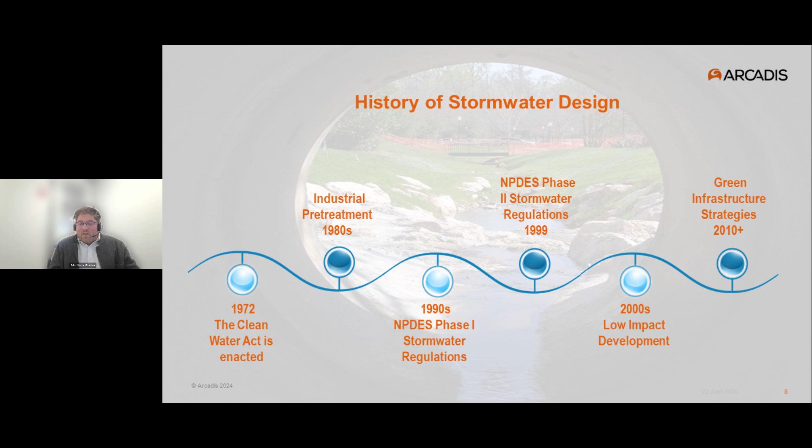So in modern times, we're shifting to green infrastructure strategies that aim to return sites to their natural hydrological condition and treat stormwater at the source.

Traditional stormwater management approaches offer poor control of the smaller, more common storm events, and in fact those things are being neglected altogether, with traditional designs allowing them to pass through a system unmanaged. These more regional approaches really focus on large, less frequent events, like the 2 through 100-year design storms.

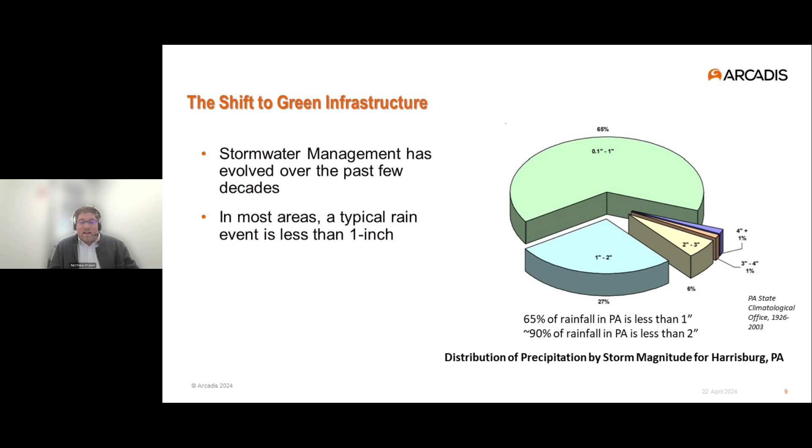So green infrastructure mimics the natural hydrologic condition of a site, and typical GI practices are designed to manage low intensity, high frequency stormwater events.

Green infrastructure practices are meant to mimic that natural hydrological cycle, and the practice on the right here is what I'd describe as a typical bump out. A lot of people have probably seen this. It collects gutter flow from a roadway surface, ponds water within the surface storage area, and then stormwater can draw down through the soil into an underground trench or storage media.

That filtration through the surface soil has a tremendous impact on improving water quality, as opposed to traditional gray infrastructure on the left, which collects dirty runoff from a street and quickly tries to convey it to a nearby body of water.

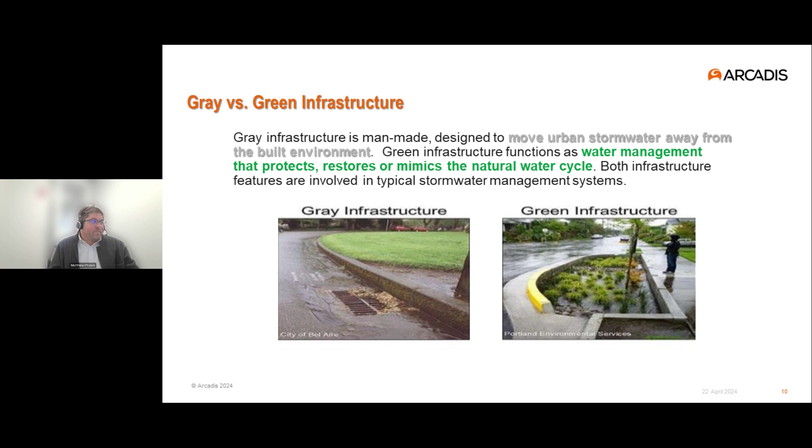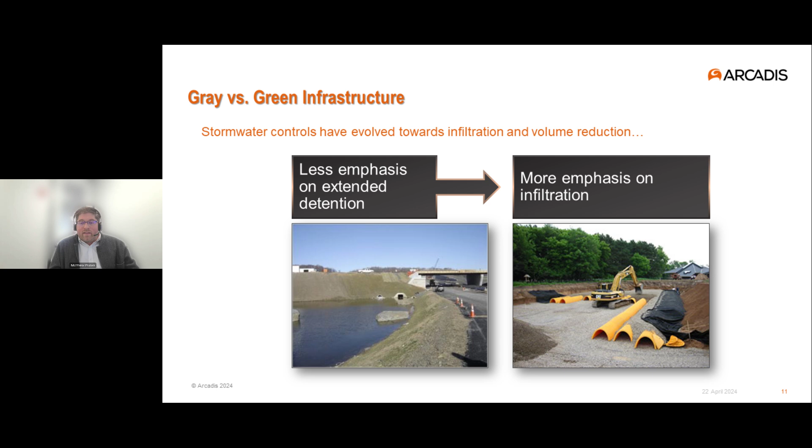So we're moving away from large surface detention basins that slowly release runoff, and moving towards infiltration practices where we can. What we see here on the right is a StormTech arch system, and those function like detention basins in that they provide rate control, but they're also providing volume control through an open bottom. Typically you'd see these placed underground below parking lots, and in some instances people utilize them for conveyance piping too.

So now we're arriving at green infrastructure and how it's different from that gray approach. Some of the major benefits of green infrastructure practices are treating stormwater at the source, and eliminating costly detention basins that utilize a lot of valuable land space.

We're not going to allow stormwater to get back into the aquifer unless we use recharge practices. We need to think of stormwater as a resource, not a waste product. We're also reducing energy demands by mitigating the urban heat island effect usually seen with large expanses of asphalt. And lastly, there's a societal benefit to green infrastructure, as liven up a space fosters a sense of community within the neighborhood.

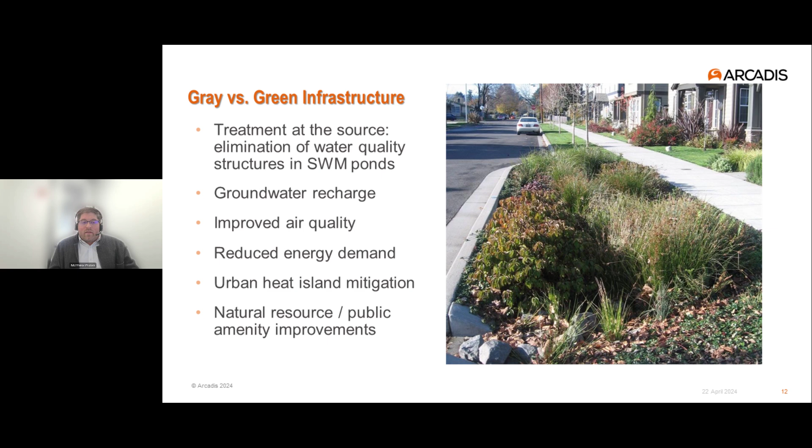So let's talk about GI design first, focusing on right-of-way green infrastructure. I should be upfront that a lot of these photos I'll be sharing today are from Arcadis projects, but not all are. Some are from my own neighborhood where I live, and others are just really interesting projects I've seen over the years that help tell this story.

And in this case, it's the right-of-way. With GI, we're going to work with smaller drainage areas and view stormwater as a resource, like I said before, and not a waste product.

We're going to manage the stormwater on site as opposed to conveying it far away. By managing the runoff on site, you're going to promote infiltration, evapotranspiration, evaporation, all those typical processes that are a more natural cycle. And you're going to be improving water quality because you're giving the stormwater a chance to be filtered through a surface soil or some other kind of media.

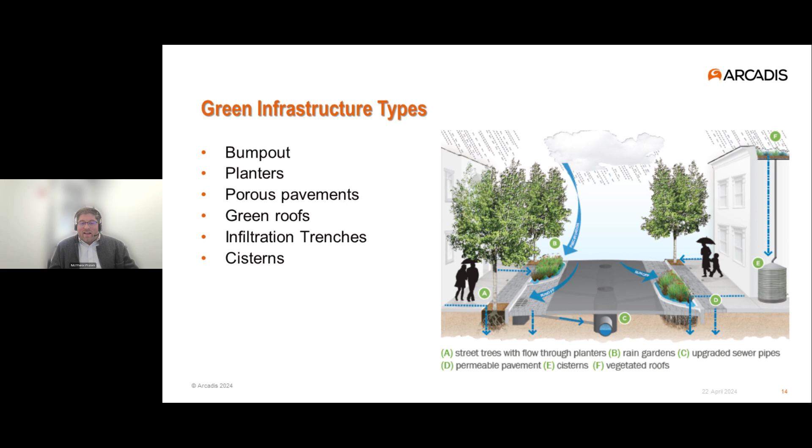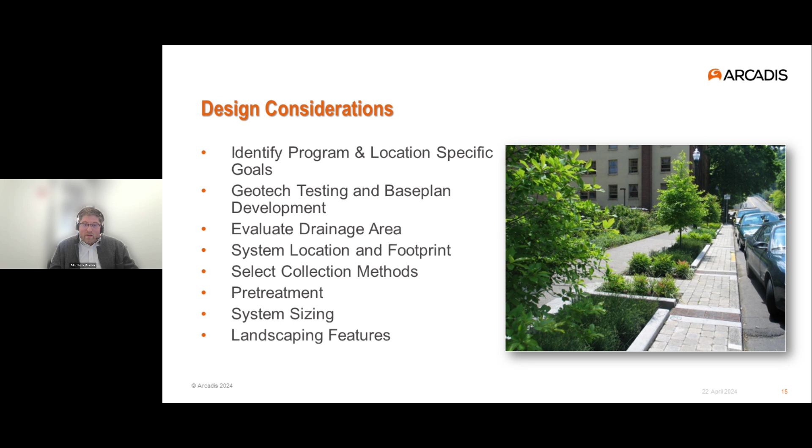So from a designer's perspective, there are significant considerations we need to keep in mind when tailoring green infrastructure to meet our site-specific issues. These can range from identifying program or site-specific goals, to how we evaluate the drainage area, to what kind of pre-treatment should be utilized. We'll step through a couple of these things over the next few slides.

As a design engineer, I'm interested in solving problems and achieving goals for a client, for a project. For green infrastructure projects, it's important for designers to be thinking about the municipality or organization they're working for, and its site-specific or program goals. On this side of the slide, I'm going to be using the Philadelphia Water Department as an example, but you'll see similar situations in other municipalities across the country as well.

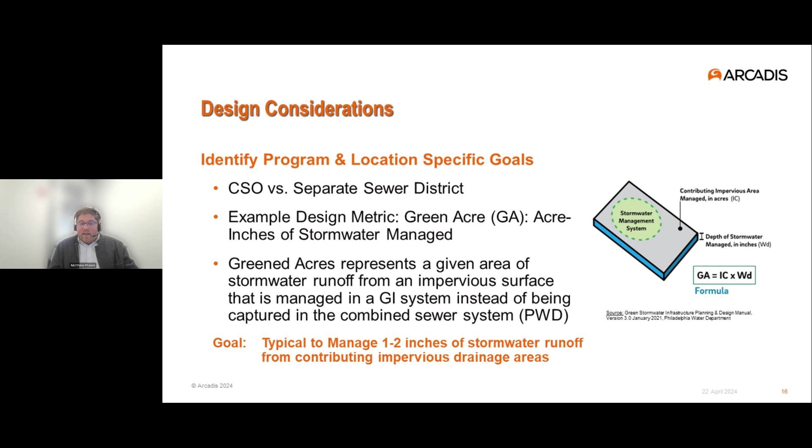One of the key metrics used a lot when evaluating green infrastructure is a green acre, which, for those who aren't familiar, is a given area of stormwater runoff that ends up being managed by a green infrastructure practice instead of being captured and handled by the combined sewer system.

Another design consideration gets informed by geotechnical investigations. Geotech investigations are important because they establish the subsurface soil characteristics and help us identify any hydrological limitations, such as bedrock or groundwater.

GI practices can still be utilized in areas that have poor infiltration rates. In that case, you'd be utilizing a slow release type of design to detain and slow down how quickly water leaves those systems.

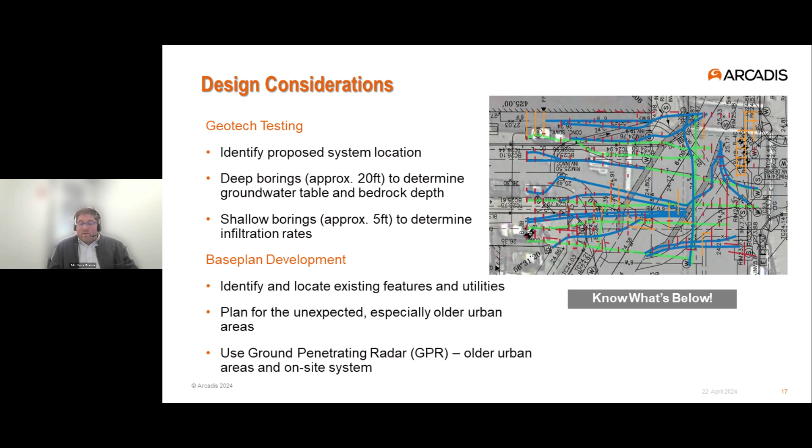In some instances, it's important for designers to utilize subsurface utility engineering or ground penetrating radar to help locate existing utilities. It's good to know that up front because it can avoid costly challenges in construction for unplanned conflicts, or even worse, if something was accidentally damaged during construction.

Another design consideration for GI practices that's really critical is location. Your practice should aim to capture the largest area feasible for a system. We can't design effective stormwater practices if we don't get sufficient inflow. In a right-of-way, urban setting, we're typically going to be looking at the end of a block. That's preferable to doing something mid-block or further up the drainage area, because you just want to maximize the area that you're managing.

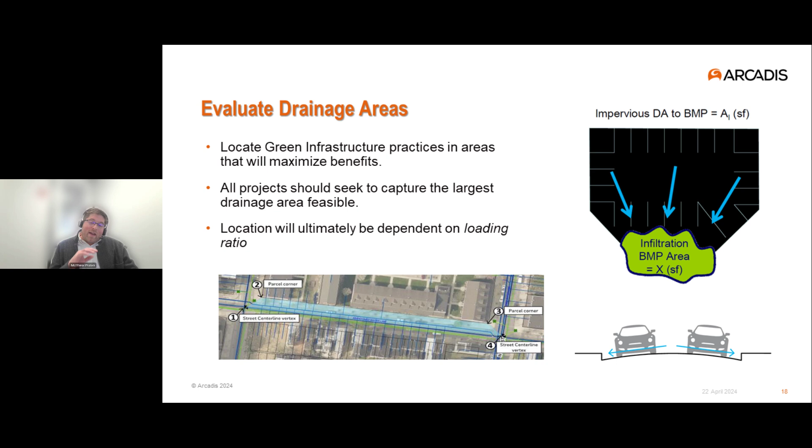A controlling factor to also be thinking about, particularly for infiltration designs, is loading ratio. If you're not familiar, loading ratio in green infrastructure is just another guideline you have to consider for sizing an infiltration footprint. Usually you're considering the ratio between the drainage area you're managing and the available green infrastructure practice footprint.

There's a couple different collection methods typically used for green infrastructure, usually done with a green inlet or a curb cut. Green inlets are no different than a regular inlet, it's just that they're conveying the runoff to the GI practice instead of the sewer itself.

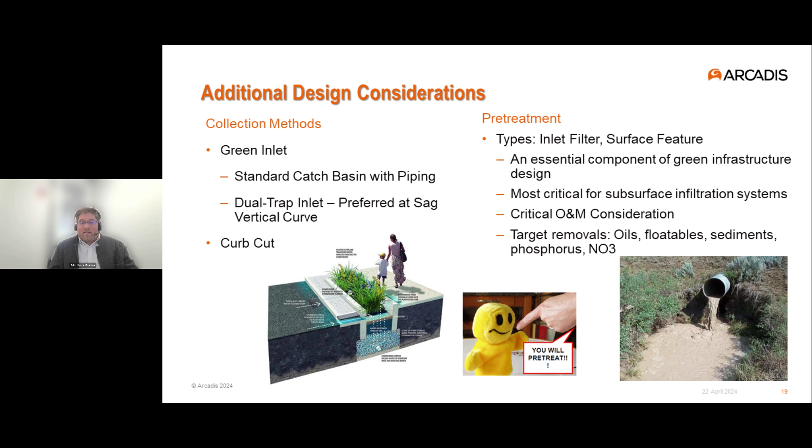One that you may sometimes see at the corner of an intersection is a dual trap, which can be used simultaneously to drain a low point and also route stormwater into a green infrastructure practice. O&M considerations are super critical for thinking about designs, because we need to ensure the longevity of an infiltration practice, and to do that best is using some sort of pre-treatment.

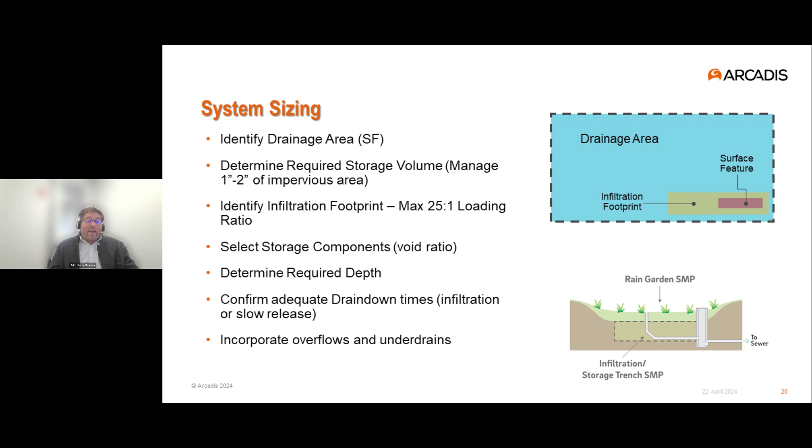When it comes to sizing your green infrastructure system, it's identifying that drainage area you're managing, making sure you're thinking through the local goals of your project, and managing that 1 to 2 inch depth of runoff. You should also be thinking about what kind of drain down time you'll need for your system, and considering what kind of overflows or underdrains might be necessary to ensure a safe design.

It's also really important to be thinking about the soil you're using for green infrastructure. This slide has a typical engineered soil recipe mix. The big thing to think about is making sure that when it gets to construction, contractors installing these systems aren't just using the backfill that was excavated, or stopping over at the local hardware store or Home Depot to pick up a bag of builder sand or polymeric sand for a system.

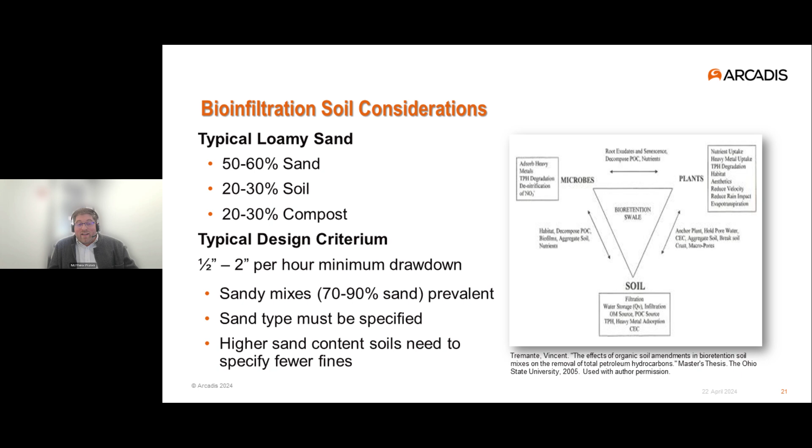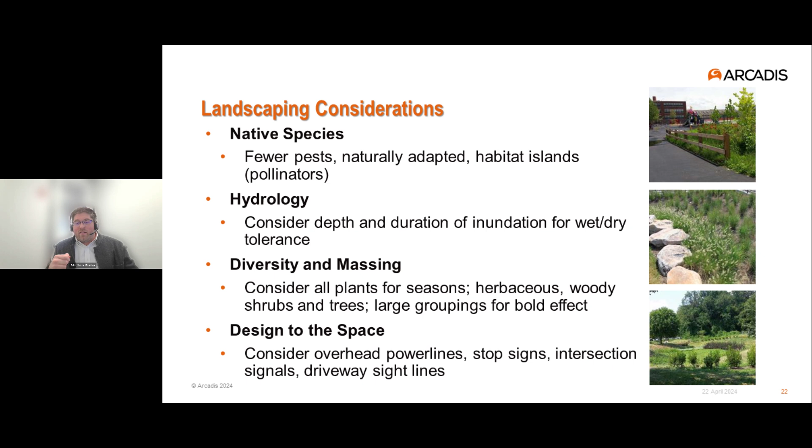There's landscaping considerations to be thinking about for green infrastructure too. Your selected plantings need to include native species, and public outreach is super critical for community buy-in at a lot of these practices. One of the common questions we hear all the time is, why are these weeds being planted in front of my house? It's not that they're weeds, but we need to educate people and let them hear from us to learn what's important, and really hammer home that this green space offers a chance for beautification and for getting the community involved.

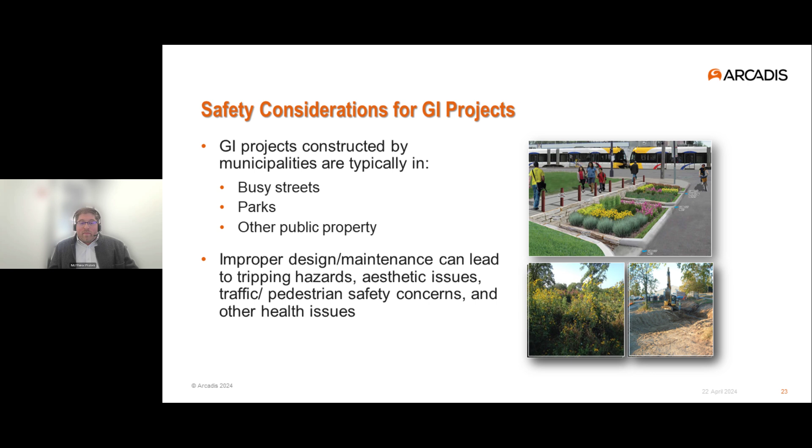Another big issue to be thinking about is safety. Many green infrastructure projects, green streets, right-of-way, bioswales, bump outs, those types of things, are usually located in the street. Rain gardens are often designed in parks where children and other users interact with them, and green infrastructure is often installed on public property, like town halls and community centers, frequented by residents and municipal employees alike. Improper design and maintenance of those features can lead to tripping hazards, aesthetic issues, traffic safety issues, and health issues, so we need to be thinking about some of those safety considerations for our projects.

There are many safety hazards that can arise in design that we need to be thinking about. It can be improperly designed drawdown times, which lead to stagnant water and insect breeding grounds. Curbs, curb cuts, anything with a large vertical drop or an uneven transition can lead to a tripping or fall hazard. Trash is the big issue, entering the green infrastructure facility or just being unsightly and limiting the performance of the practice.

Another thing we'll touch on is the lack of roadway striping or signage when you're changing traffic flow in these areas because of a BMP, and how that impacts driver safety. I'm also thinking about things like improper viewing angles for a vehicle at an intersection, or just pedestrians utilizing crosswalks.

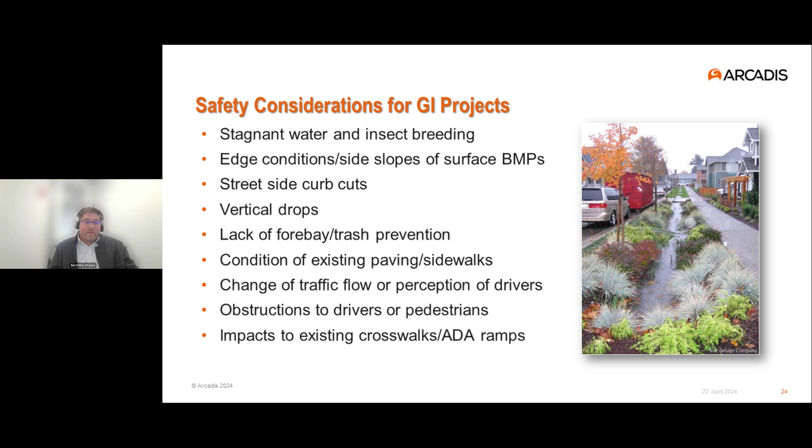So getting into some of these things, starting with essentially minimizing poorly draining water. Like we've mentioned a few times now, there's two safety hazards to think about: stagnant water and drowning issues. The potential for drowning is definitely a consideration when small children might be present, because it's important to think about - you only need a few inches of water where a person can become a victim of a drowning issue, unfortunately.

Also, mosquitoes breed in shallow, stagnant water. So it's important that our designs, as they detain and retain stormwater, make sure we're doing what we can for drain down to avoid breeding grounds for mosquitoes, which are both a health hazard and really just a nuisance issue. A lot of these systems target a drain down time of 72 hours or less, sometimes driven even more stringently by local codes and ordinances.

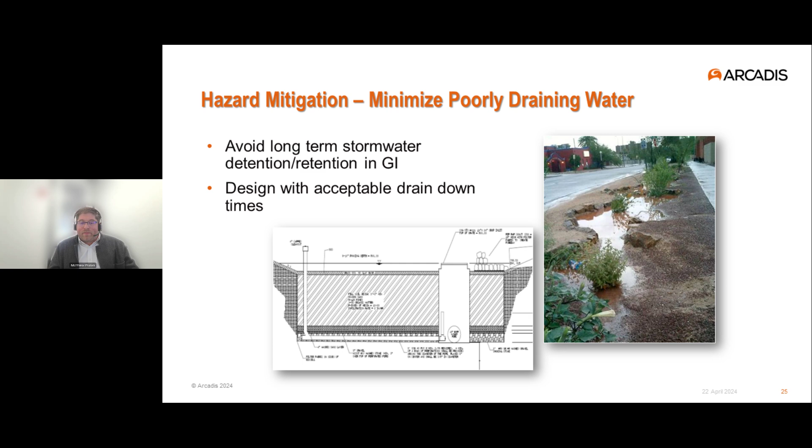In terms of providing proper edge conditions on surface green infrastructure, particularly for rain gardens, bioswales, bump outs, and those types of things, one of the key things is that your terrain is really going to dictate the design of the system, but we want to try to avoid steep slopes as much as possible. Side slopes need to be gradually sloping banks. A 3-to-1 grade is usually acceptable, and when you can do better than that, we should.

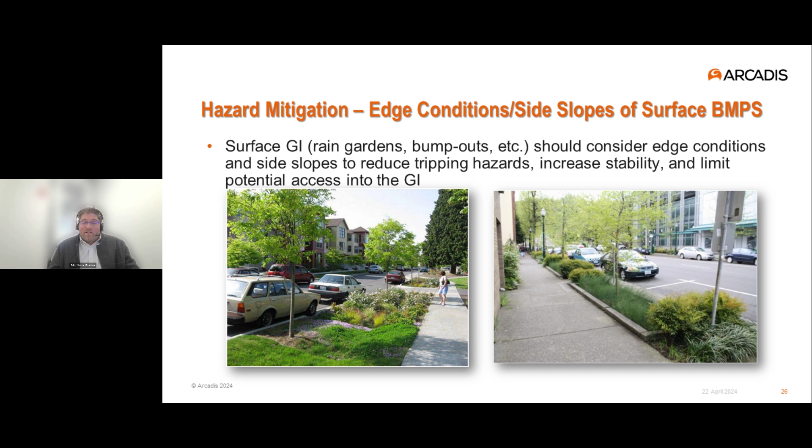When possible, if a facility has a steep side, we want to locate that away from a pedestrian route. As the photo on the right shows, shallow curbs between the sidewalk and a green infrastructure feature may look like they provide a visual barrier for somebody walking there, but we've actually heard stories from clients that they end up, more often than not, being a tripping hazard. That's usually due to people walking around paying attention to their cell phones, not thinking about where they're going, or just being distracted in general.

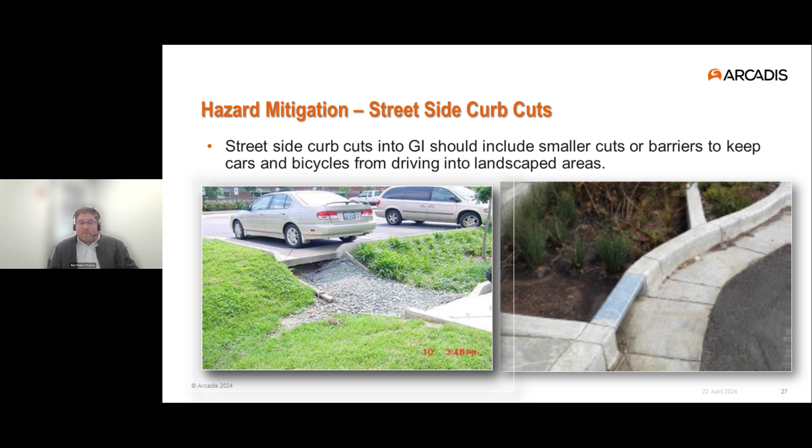Another common design issue is deep vertical drop-offs from the curb to the bottom of a green infrastructure system. We really want to be thinking about two sides when designing for these deep vertical drops: what's happening adjacent to the parking lane, and what's happening on the pedestrian side. For a lot of downtown or urban areas with parking lanes adjacent to green infrastructure, this could be a major issue for safety in both dry and wet weather.

On the pedestrian side of green infrastructure, many cities use things like fences or decorative railings to prevent pedestrians from accessing the green infrastructure. The access deterrent is a visual thing, but it also helps eliminate the issue of the vertical drop in general.

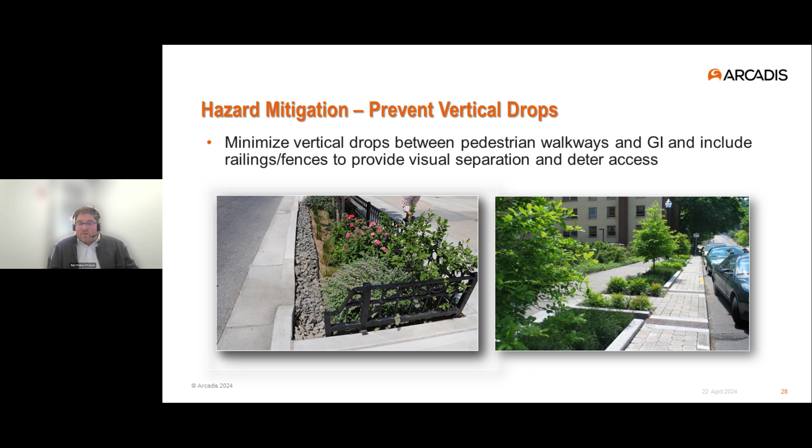I think a lot of local areas will tell you that you need to have some sort of fall protection, like a railing or a fence, if you've got a vertical drop of 30 inches or more.

Like we discussed earlier, trash is a huge issue. Things like cigarettes, candy wrappers, bottles, and cans, whether they get washed into a system through a storm event or get thrown in by a pedestrian, it's a major issue.

Green infrastructure needs to be designed with a forebay area. You can put a screen, a filter, or similar pre-treatment device to help collect that trash. It also can act as an energy dissipator, and it's a spot to make maintenance easier. It simplifies removing all that collected debris and prevents trash from collecting inside and limiting the green infrastructure's performance. Trash can also clog engineered soil or the underdrain, and then you have that issue with stagnant water again, like we talked about, where we'd be concerned about drowning issues or insect breeding.

One thing that some municipalities have adopted is putting collection bins next to the green infrastructure if possible, because it helps discourage people from throwing things in the green infrastructure if they can see there's a trash can to put their rubbish.

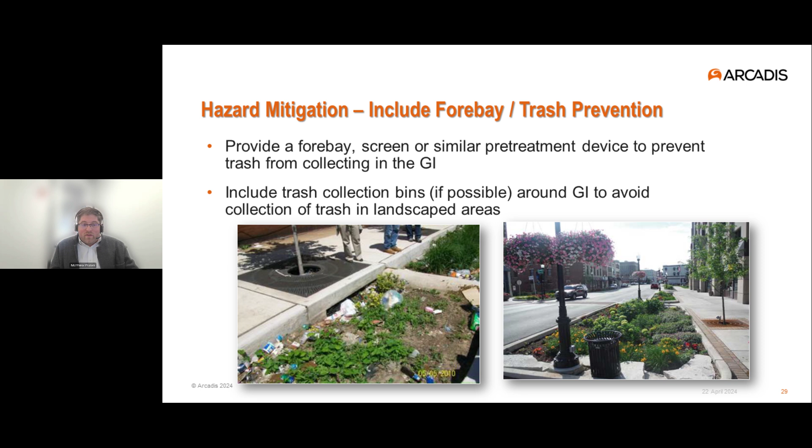One other issue that wasn't really addressed as much as it probably should have been in a lot of earlier green infrastructure installations was proper identification about changes to traffic flow areas where green infrastructure was added adjacent to a roadway. A lot of these green infrastructure practices can be utilized for traffic calming measures, which helps reduce speed and traffic volume.

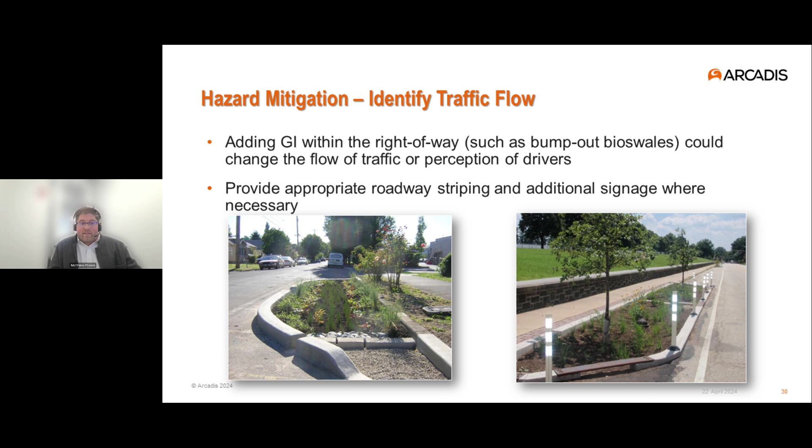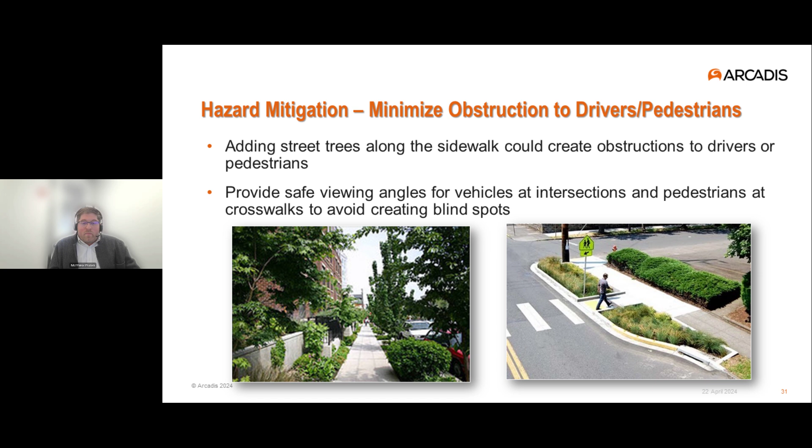We need to be thinking about providing safe viewing angles for vehicles at intersections and for pedestrians at crosswalks. You can see that photo on the right is a bit more of a cleaner example of how you can avoid creating blind spots.

Finally, a lot of urban green infrastructure programs, especially in major cities, are locating their SMPs in urban rights-of-way. It's important to think about the changes to the sidewalk, to the crosswalks adjacent to these GI features, and ADA ramps. Anytime you have a ramp that's affected by new installations, we should also be thinking about upgrading the existing ramps to be more ADA compliant.

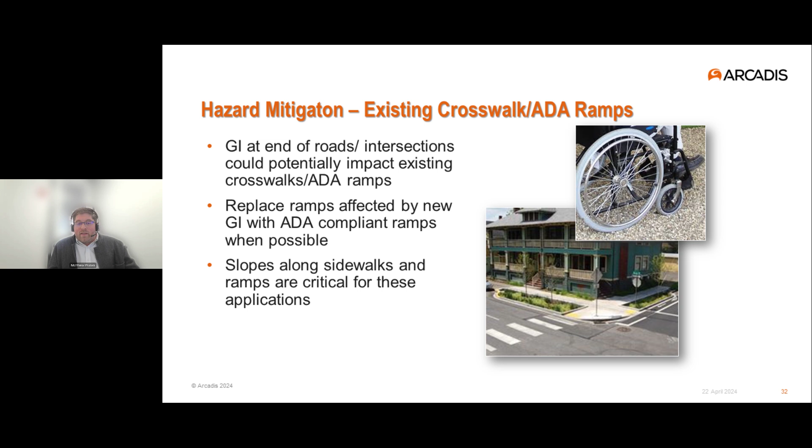And sometimes you need to be thinking about those that are close to, but not necessarily right next to, green infrastructure too.

Let's move on from the right-of-way and start talking about options outside of the traditional right-of-way. All of these concepts we'll be talking about now are centered around thinking beyond the streets. So a couple examples to consider here are large medians or vacant lots, parks, playgrounds, and other public works areas are opportunities too. And in some instances, we've actually seen utilizing front yards in residential neighborhoods as an option.

So what are the benefits of looking beyond the right-of-way? You get a much larger surface area, so there's a possibility to take in more drainage area without blowing out that hydraulic loading ratio we were talking about earlier.

Generally, you have a lot less utilities than what you'd find in the streets. We don't lose existing features that sometimes detract people from green infrastructure in the right of way, like parking. You're not going to change traffic patterns. You don't have to worry about those ramps we just talked about. Instead, it's a chance to maybe enhance an underutilized or bleak space.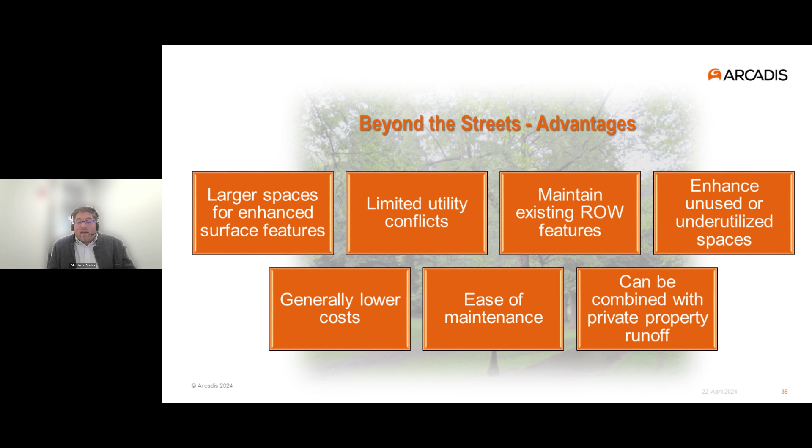And I've got some examples that I can show over a couple of slides here. Lastly, because you're in an area that's likely less congested by traffic or utilities, the construction costs can be estimated to be a little bit lower because we're not going to be rebuilding roads or sidewalks or dealing with so many of those conflicts. And here you get an even bigger benefit, like a double whammy, of managing both public and private property.

I think we should also take a minute to think through some of the challenges working outside the right-of-way too. Land ownership's a big one because it's not always something that's typically available, especially for municipalities. Also, there may be use restrictions on land too. Conveyance is a big issue, and we'll show some examples of that in a couple of slides here too.

Another thing to think about is while we want community engagement and action, not all neighbors really appreciate that. When you add these green spaces, it's going to attract more people to these locations, and some folks just don't want the extra visitors in their neighborhood.

Lastly, elevation is a huge issue because typically roads get cut in and then you surround those roads with lots that drain to the road. So that can be a challenge to think about overcoming.

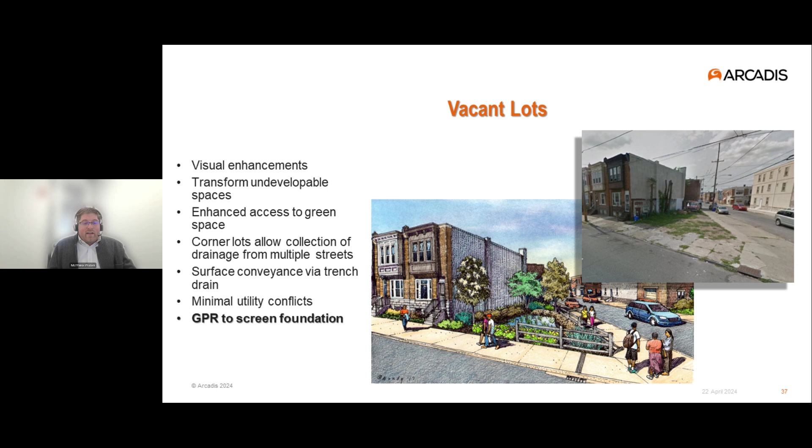I think it's a good space here to start talking about the vacant lots in general. This slide does a good job of showing how you can transform an underutilized space into something that's got a lot more visual aesthetic. Corner lots you can't always develop effectively, but one of the benefits of siting green infrastructure at a corner lot is you have an opportunity to manage stormwater from two streets instead of just one. A big thing here that I'm going to highlight on the next slide is going to be GPR again.

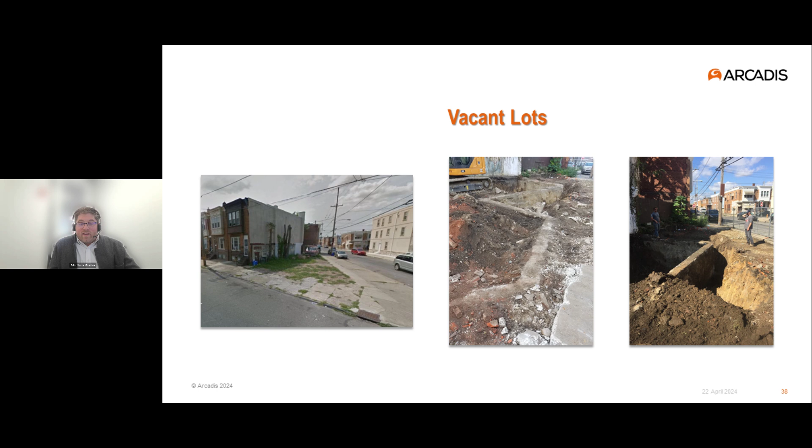So after this, the lesson learned, the takeaway here was we more regularly utilize things like ground penetrating radar as just part of the regular process at vacant lots, to see if an issue like this will pop up.

We'll go back to something that I think is a little bit more exciting, and I like this one a lot. It's a great example of a vacant lot green infrastructure system, and it's located right by my house, actually. It's a subsurface storage area with a rain garden component, and it's really interesting because it's a neighborhood favorite, especially in the spring and summertime.

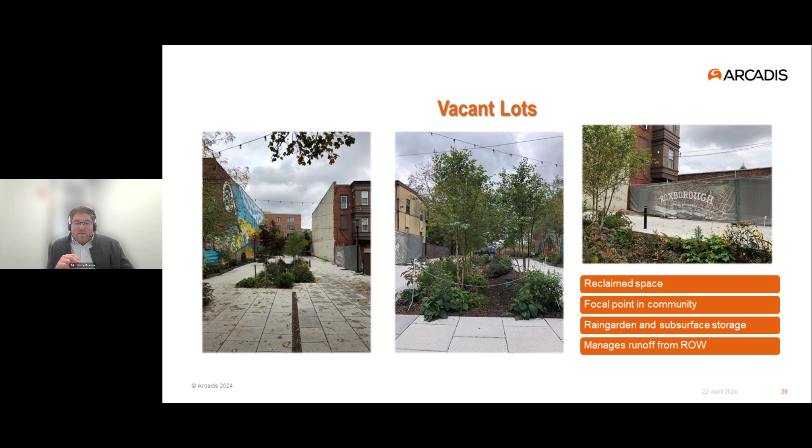I take my own kids here. It's a site that sits on a commercial corridor. There's restaurants, pizza shops nearby. There's always tables and chairs that are placed here for the community to sit and enjoy the space, and it's attracted things like food truck festivals and community events. But the real important thing is that it's managing runoff from the lot, but also from the public right-of-way as well.

Large medians, things like triangle parks - these we have all over Philadelphia where I live, but you can see them in other places like New York and Washington, D.C. too. It's really just a result of a boulevard that bisects a gridded network of streets. These are great spaces for considering green infrastructure.

Often it's underutilized, but community members do use it for focal points, for gathering points for activities. Like the vacant lot, oftentimes you can get multiple drainage areas from different streets, and usually there's not as many utilities to deal with.

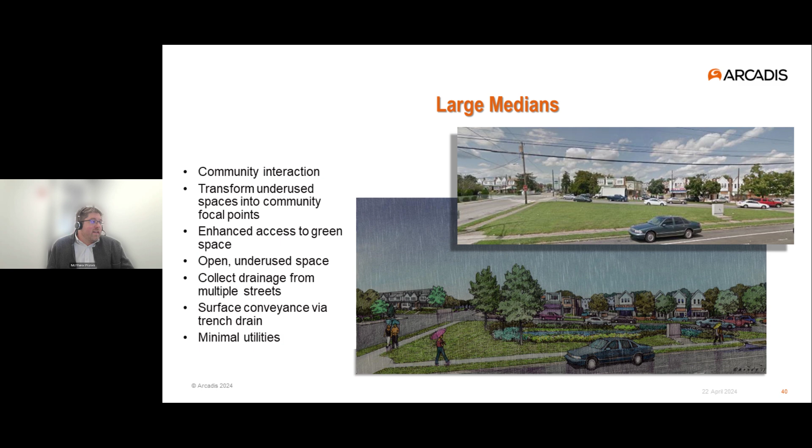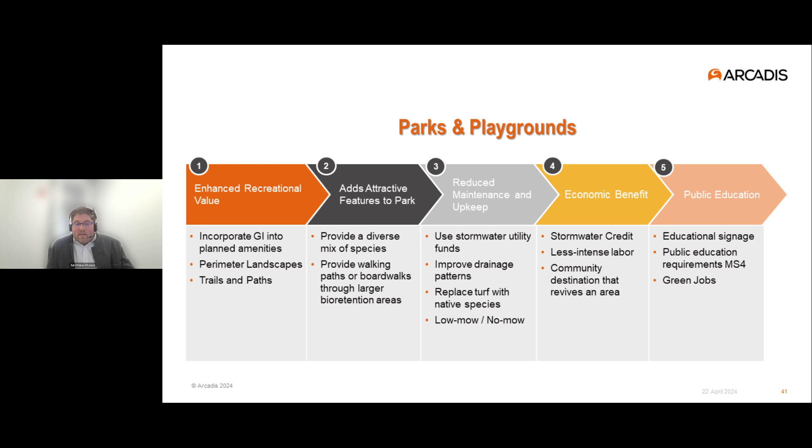Some other areas to think about for green infrastructure, beyond the streets and outside of the right-of-way, but these areas are typically abundant in cities, are existing parks and playgrounds. I like this graphic because it kind of details a whole lot of benefits when developing green infrastructure and other programming in these spaces.

Playgrounds, in particular, provide a really good opportunity to connect the community with the work that we do and with the parks themselves, while providing this awesome space for a green infrastructure project. One thing we do on a lot of our projects is add educational placards, because it helps the public know what's below and why you should or should not be walking through certain areas of the park.

Where they have rain gardens. In other communities, maintenance and litter patrol ends up being taken over by local residents who really value this installation that ends up near them.

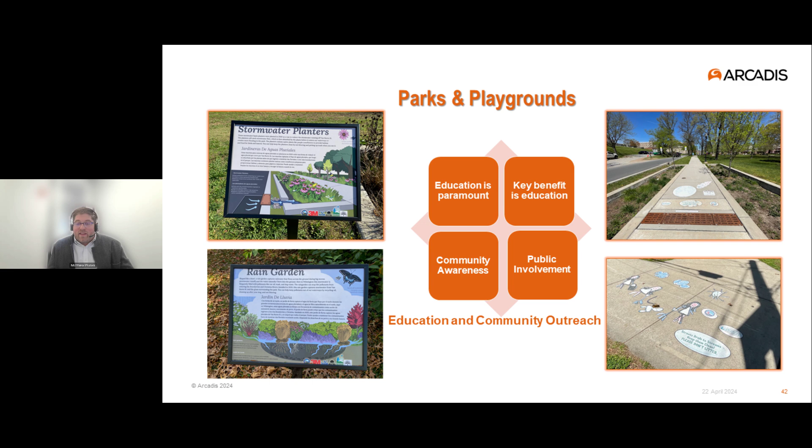And it just so happened we weren't really aware of this happening. I ended up walking the site with the city's public works team, and we found these things, and we were all really struck with how wonderful it was to see local stakeholders taking ownership of that green infrastructure and providing that community awareness piece.

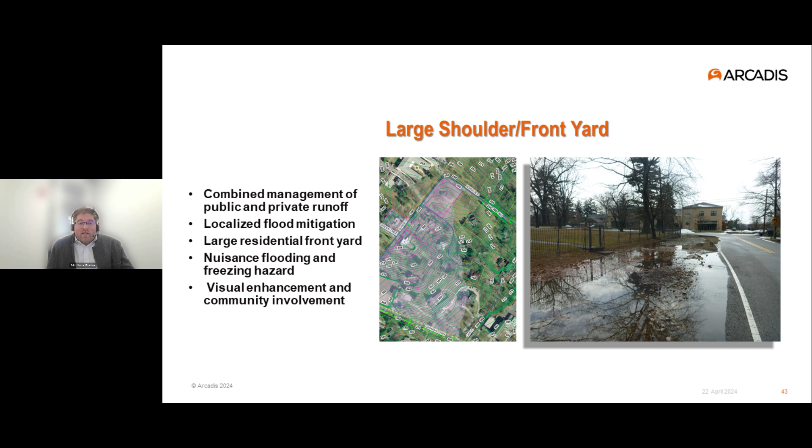Another really unique spot to think about that's outside of the right-of-way can be a large shoulder area or a front yard. And the photo here really shows an example of a situation we encountered a few years ago, where the shoulder and part of this person's front yard ended up with nuisance flooding that would pop up and result in freezing issues in the wintertime as well.

So you can see how this space, this front yard area, got transformed into a green infrastructure opportunity. It eliminated that nuisance flooding, it beautified the area, and it worked really well because in this situation there happened to be minimal utility conflicts right next to the shoulder in the front yard, and we had a very committed resident interested in seeing something like this.

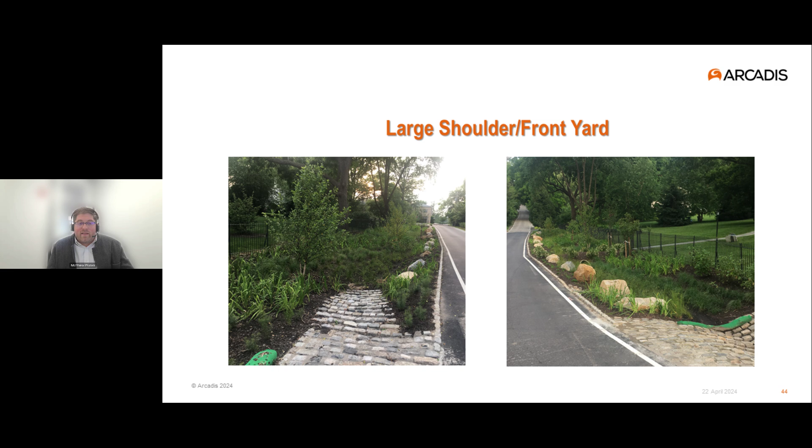So we've been looking at some design considerations and challenges and examples of green infrastructure within the right-of-way and beyond. I think next we can start looking at a couple of examples of recent projects where green infrastructure was really used as a vehicle to get more done. And I'll show you a few examples of what I mean by that.

The first project that's really interesting I can share with you is one at Cool Spring Park in Wilmington, Delaware, and I talked a little bit about it before. For some background, the park is located adjacent to the historic Cool Spring Reservoir, and it's really an urban oasis that's used by the local community and by a couple of schools.

Fast forward to 2018, and Cool Spring Park now regularly experienced flooding issues when even a minor storm event came through, and it would render the park and a lot of the playground spaces just unusable. This affected two local schools, the Parks and Recs department, and community groups that used the spaces, who had farmers markets happening there weekly, carnivals, food truck festivals, things like that.

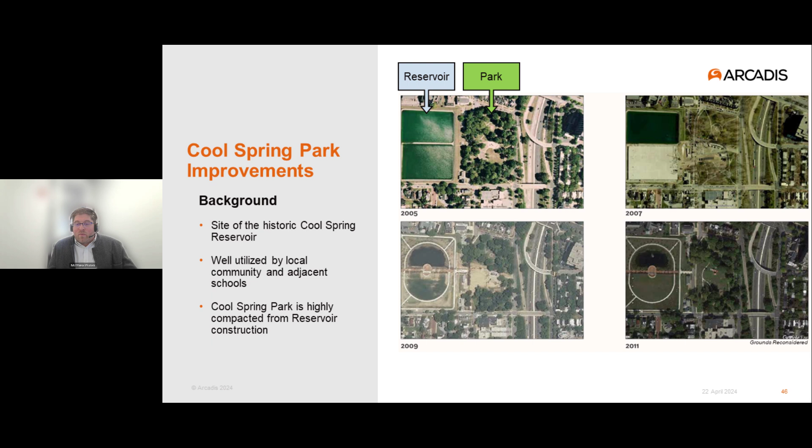So it was a situation where the Department of Parks and Recreation and the Public Works Department decided to partner with a goal to address this flooding issue.

So Public Works and the Parks folks both recognized there was a chance here for them to work together. From the Public Works team, it's important to know they made commitments as part of the city's long-term control plan to implement green infrastructure as a means of source control. The Parks and Recs folks had been evaluating this park location for improvements as part of a master planning effort, engaging with community groups and getting input. Those groups really wanted to see green space, outdoor classrooms, and improvements so that flooding wouldn't keep happening.

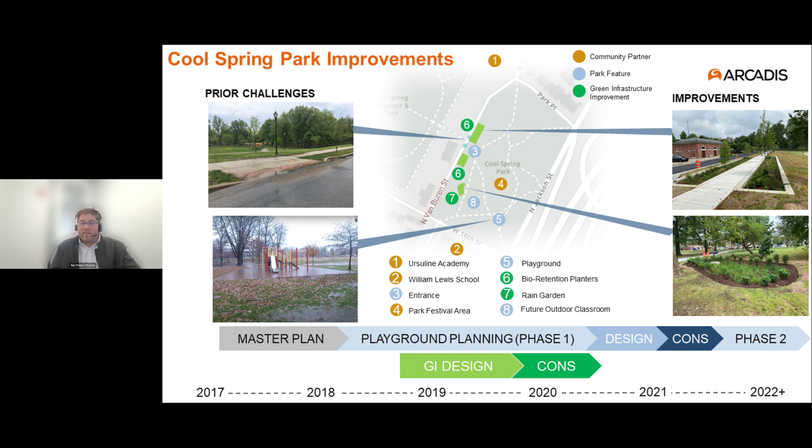Like you can see on the right here, the improvements designed and implemented were bioretention planters that managed right-of-way runoff, and they nicely framed the entrance of the park. There was also a rain garden that replaced the overly compacted soils in one corner. The rain garden area is really interesting because it's planned to become the beginning of a larger green infrastructure feature added in future phases of park improvements, and they're looking at using it as an outdoor classroom space.

So what are the overall project outcomes to take away as lessons learned here? The green infrastructure was sited to intercept stormwater in the right-of-way before it could enter the park, making a safer condition. It also addressed one of the long-term control plan goals for the city. Given the timing of engagement between all these stakeholders, the visible aspect of green infrastructure was implemented, making a space for the public to interact with a green space.

That led to an unexpected but really cool, satisfying situation where just a year later, the community and the Parks and Rec team chose to change their master plan after interacting with the space, to relocate the playground I've been talking about up to where these green infrastructure practices were. Since Parks and Rec provided space in their park master plan for Public Works to site this green infrastructure, and that addressed the long-term control plan goal, it allowed the parks folks to reallocate some budget dollars within their master planning effort to do something a little bit more.

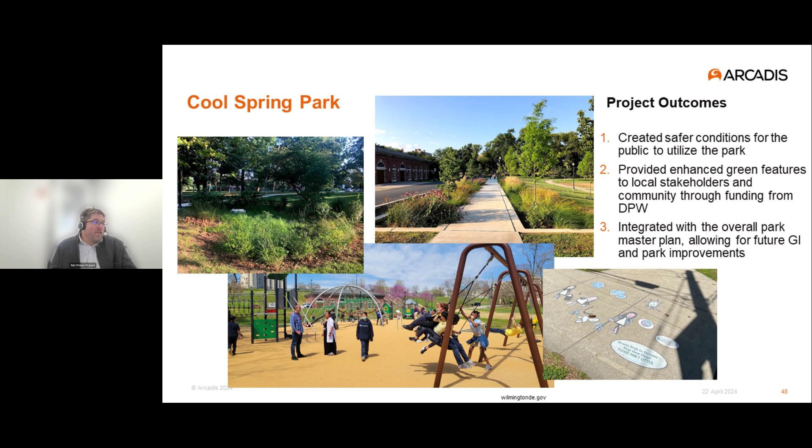The last example I want to talk through today is utilizing green infrastructure as a vehicle to get more done, found at another project in Wilmington, Delaware, called the Urban Artist Exchange. This project ended up being a collaboration between the Department of Public Works, CityFest, and the Urban Bike Project, two organizations utilizing the city-owned parcel.

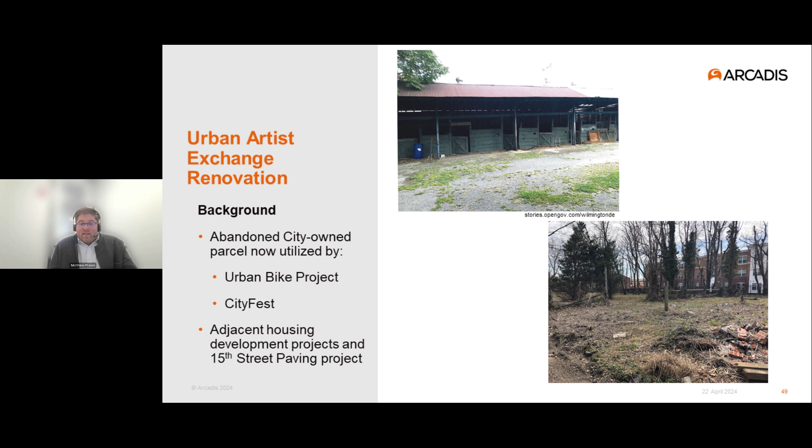It was previously an abandoned parcel that once housed the Wilmington police stables, shown in that top photo. This has been renovated since that photo was taken, and it's transformed the space into a cultural arts center for the community and a performance venue.

The story here begins further back than just the site itself. There were two housing developments called Walnut Ridge and Walnut Place. When they were being constructed, those developers needed approvals and permits, and while reviewing the development, the city's Department of Public Works identified an opportunity to see if the developer would install separate stormwater piping at these housing developments.

With a future goal of managing that runoff from the sites onto the city-owned parcel, as the green infrastructure planning and design for the site kept continuing, more projects were coming online with other stakeholders requiring even more coordination. One was a roadway widening and repaving project with the city streets department, including the segment of 15th Street bordering our site, right above one of these developments.

Lastly, the two groups, CityFest and Urban Bike Project, were already looking at rehabbing the site themselves. So the Department of Public Works acted as a connector between all these different improvements, and the planning across these four projects really coalesced into a really cool opportunity for each of the stakeholders.

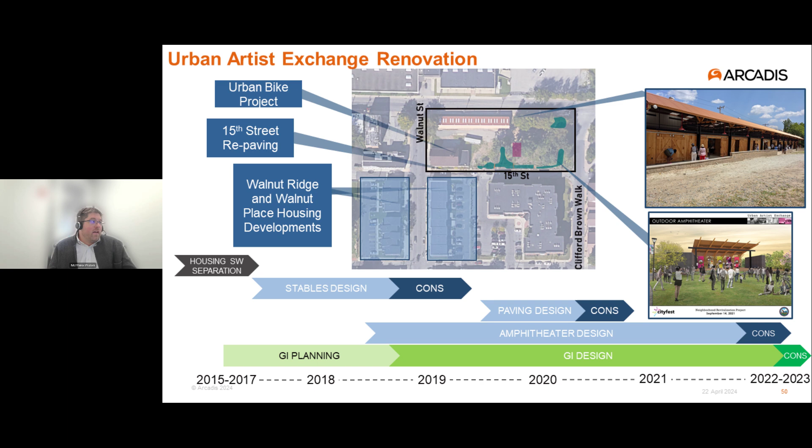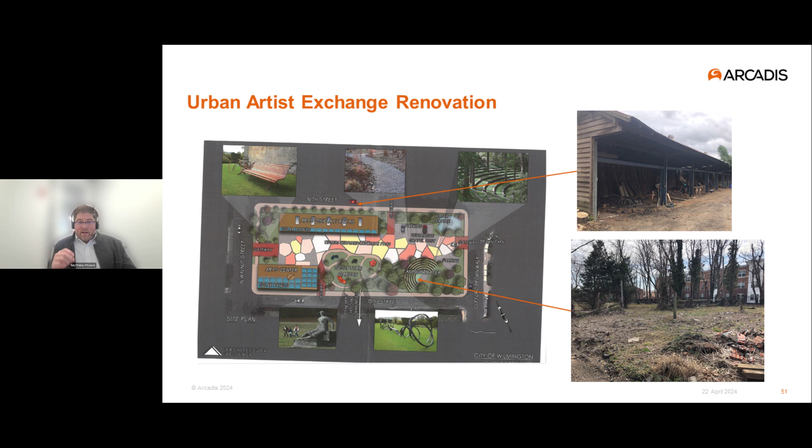They were looking at repurposing those stables for art spaces on the north side of the park. They had an outdoor sunken amphitheater on the southeast side, and there were tracks, paths, and driveway improvements that could be used for different programming activities. Take note, though, that there doesn't really seem to be a whole lot of stormwater planning in this concept.

Because of that early engagement with the Department of Public Works and the different stakeholders involved, all the different design teams were able to meet up, discuss their project goals, and collaborate to get more done than each of them had originally planned.

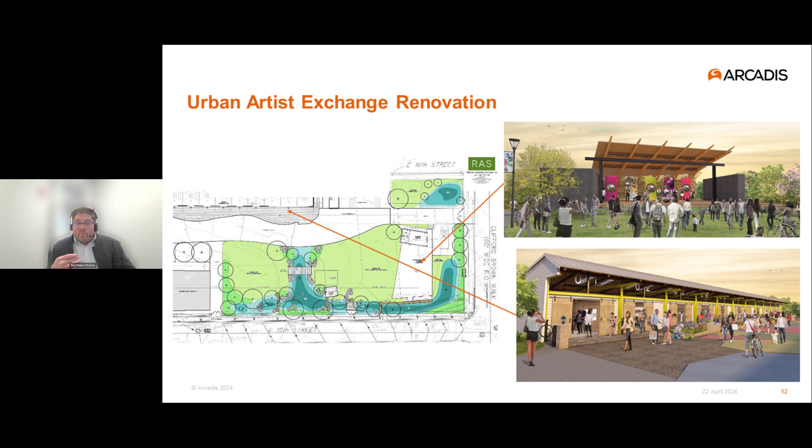You can see, though it's harder to see because of the scale, the roadway repaving project that was completed. They ended up trying to maximize the area they were managing by super elevating the road and pushing all the runoff towards the site so it could be captured.

In terms of a stormwater approach, we partnered with a landscape architect for their design team, focusing on prioritizing a green infrastructure forward solution at this park that complemented the park features. So what we ended up doing was a series of cascading rain gardens that bounded that 15th Street side of the site, adjacent to the performance amphitheater.

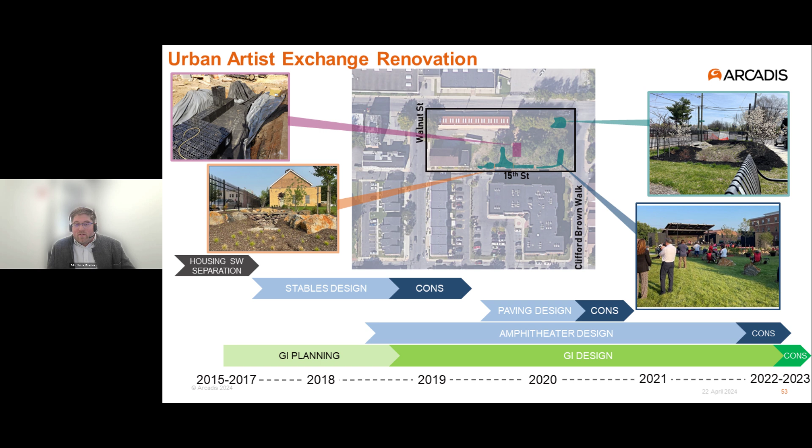We also worked to have a pedestrian bridge that crossed over the rain gardens and swales that the public would use as they access the site, creating a really big aesthetic as you walked onto the project. There was also a boardwalk over a rain garden connecting two different viewing or programming areas at the site. Additionally, we utilized some subsurface storage in the area immediately in front of the amphitheater, and there was another rain garden managing runoff from the street to the north.

The takeaway here is that early engagement led to a greater comprehensive site programming opportunity, I guess is the best way to describe it. Department of Public Works was able to take on costs related to some of the site improvements that were tied directly to putting the stormwater or green infrastructure practices on the site.

The Department of Public Works was able to unlock funding opportunities that wouldn't be available for traditional redevelopment projects. They could and did apply for state revolving fund loans and other grant monies that were awarded to the project and helped finance it. This allowed other project stakeholders to reallocate some of the funding they had and think bigger. The biggest example of that on the site is the state-of-the-art performance amphitheater that you can see in these photos.

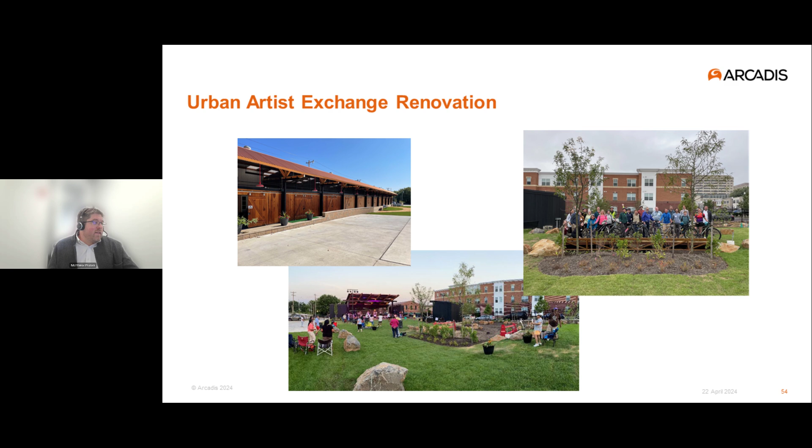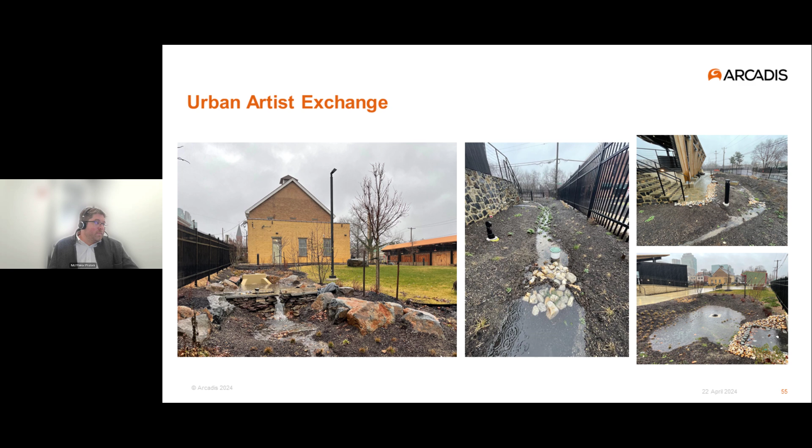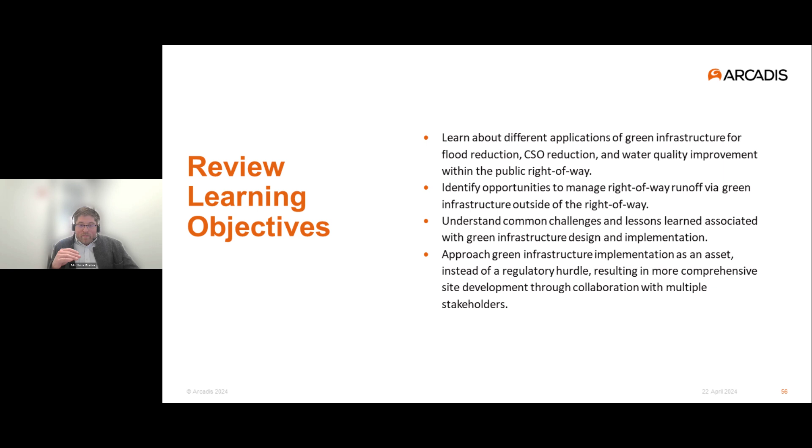As I wind down, I wanted to spend a minute recapping some of those learning objectives. Hopefully folks listening, whether you're brand new to green infrastructure design or more experienced with it, found something of value in this conversation. At this time, I'm happy to take questions from folks or things they want to share or discuss. If we get short on time, feel free to reach out to me via email, and I'll do my best to respond.